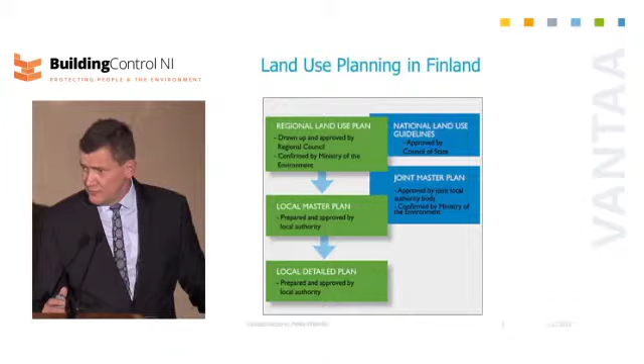So if you buy a plot where there is a detailed plan, you have the right to build there. If you apply for a building permit, and the plan is according to the local detailed plan, we have to grant the permit. We don't have any discretion in that respect.

Here is an example of a local detailed plan. For us it is like a law. The picture shows the plots, the roads, and also places for schools and kindergartens. It is approved by the local municipality, so there is no state involvement - these are independent decisions of municipalities. We have 300 municipalities; the smallest has 1,500 people, and the biggest, Helsinki, has 600,000. They all have the same rights and the same law behind them.

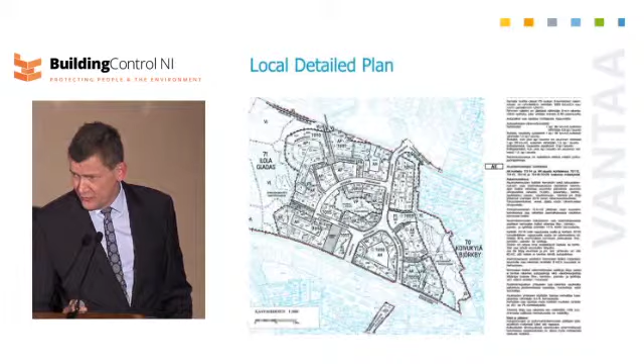Here is the simple structure of a building permit. You have on your seats a small brochure of our building process guidance for one-house buildings. First, we give guidance to the builders before they even start to plan their building.

Then when they have planned their building, they make an application form. Our system is such that we approve every main designer, so the applicant must give us information about the main designer, and then, depending on how difficult the building process is, we approve the qualified main designer. He makes the drawings and then submits an application form.

Then we have to make a notice for neighboring landowners - all the neighbors will be informed that there has been an application for building.

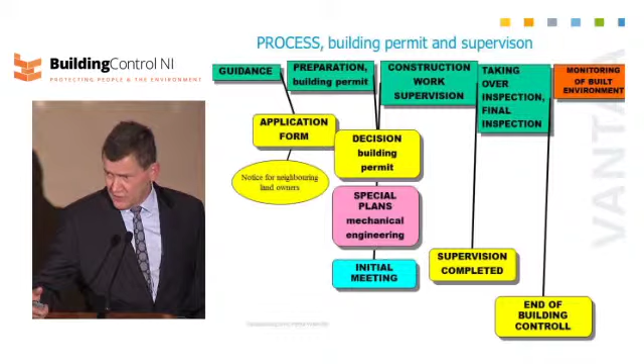And then when the building work has been completed, we have a kind of supervision, and we give the owner of the building the right to take it into use. This is our kind of momentum, because if we don't give permission to take it into use, it cannot be used. If they try to move in, then we can get the police or something else to stop that activity.

And that is the taking-over inspection. And then after that, this is the end of building control.

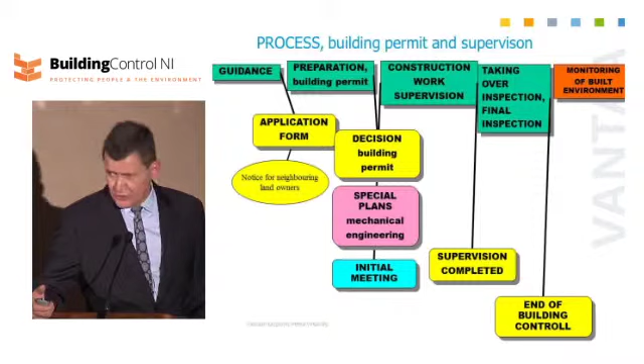Then we also have an obligation in Finland to supervise how people take care of their buildings, so that we have authority to give them orders to paint the building or take care of it, also the groundings. And that is our job today.

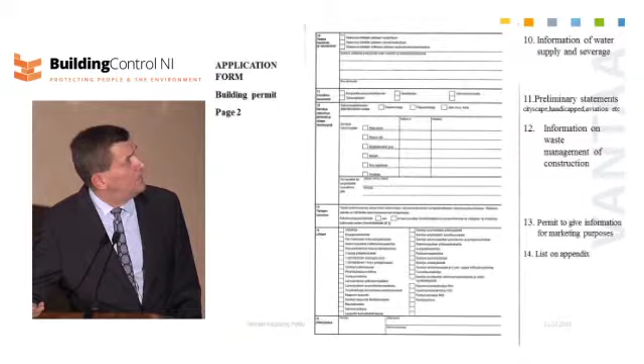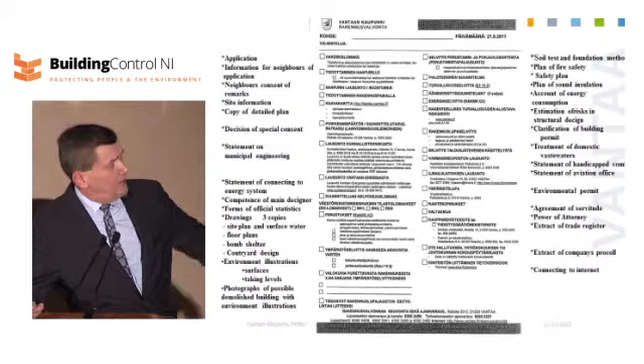Here is a normal application form. There is what kind of preliminary information we need. Here are all the kinds of papers and plans that we need for making the decision on the building permit.

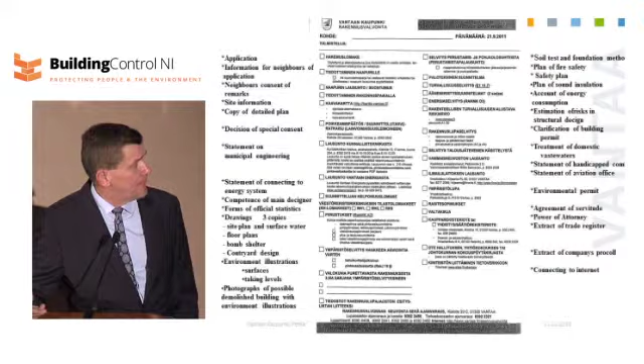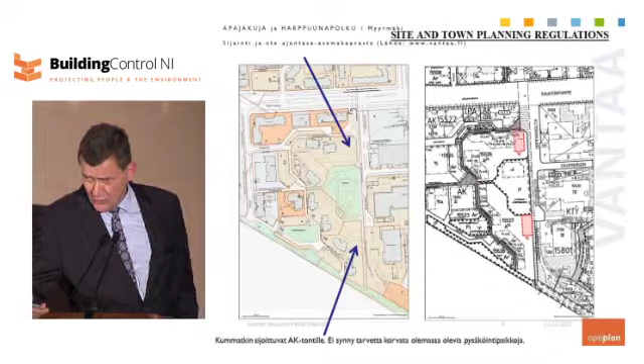Here is an example of a building. There was an 8-story building built there. There is the master plan, or detailed plan, on the right side, and here on the left side, what has actually happened there.

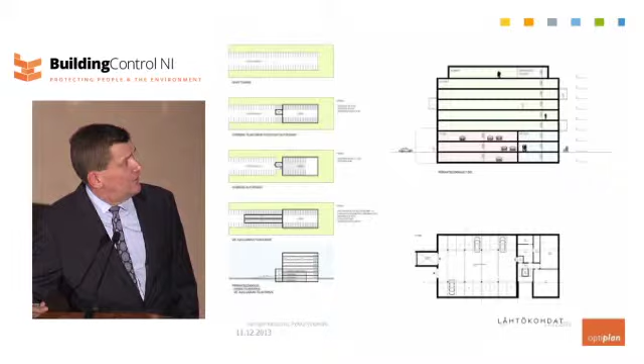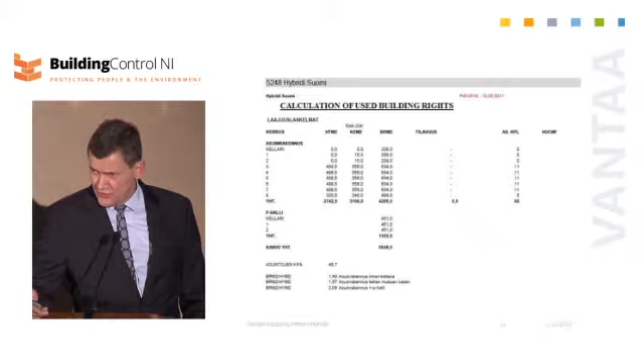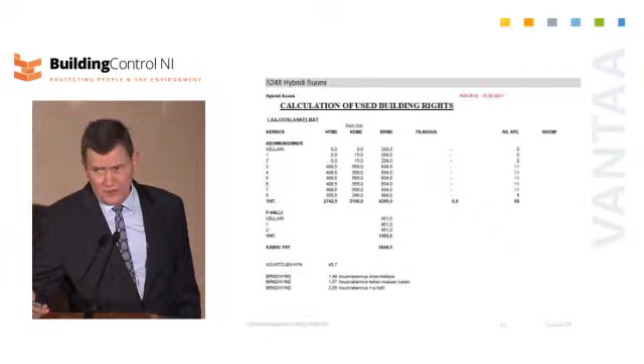Here is a normal house. There are two blocks of parking and then 5 blocks of housing. And in Finland, the master plan has very detailed norms of how much you can build there. Every square meter is mentioned there.

Then for the last 5 years we have had very strict energy saving norms in Finland.

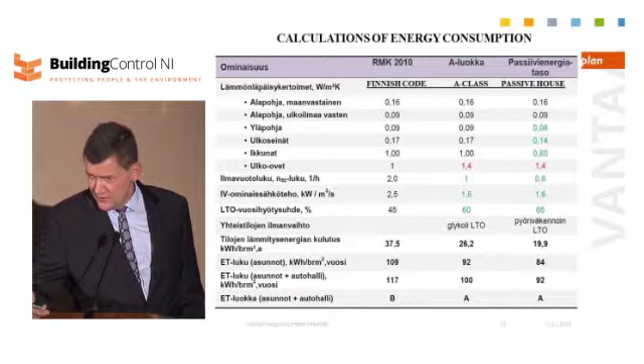Then there is the fee for our building control. If we think about a single house, the normal fee for building control is about 1,500 euros. It's much more than you have here in the UK, but no one complains about it in Finland.

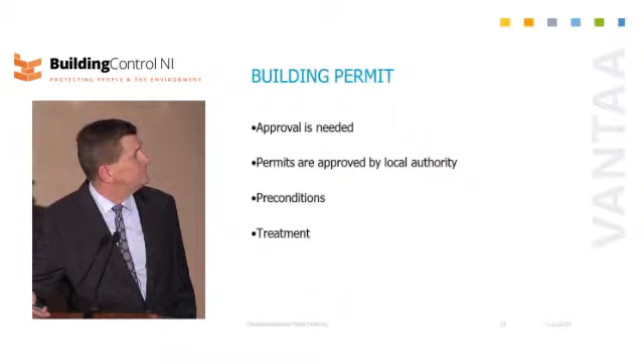Now, our problems in Finland: we have 300 local municipalities, and every one has its own local building controller. In Helsinki there are 120 people working for building control, but in smaller municipalities, the building controller is also the city architect, and that's why the expertise and knowledge about technical things is very low in most of our country. I think in the 20 biggest cities we have very good control over building processes, but outside them it is very poor.

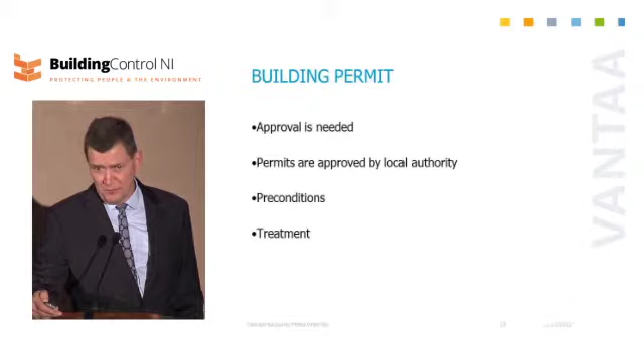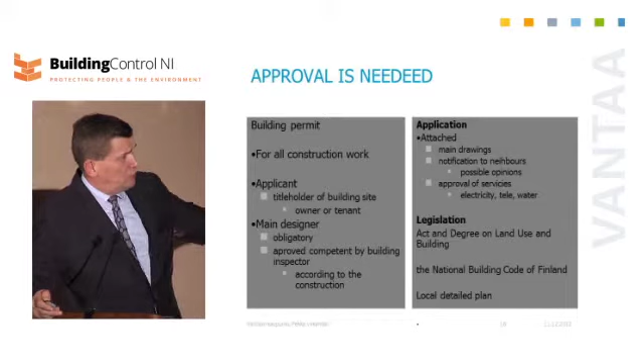But you have the material there in your booklets, so I won't go into details anymore.

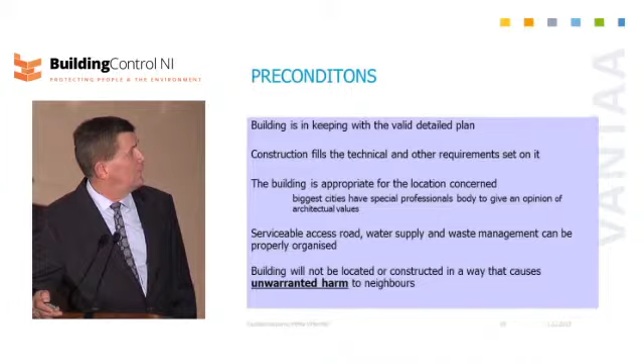But generally speaking, you have struggled with your position in the UK; here in Finland, people rely very much on building control, so we get more and more jobs all the time, and also more and more personnel, so there are no problems with building control. We only have to organize ourselves so we can give standard quality across our country. Now the government has decided that by 2016 there should be only 50 building control bodies covering the whole country, and we are very much looking forward to it in our association.

The association that I'm also representing has 700 members out of 1,000. It is voluntary, and we also have educational days, 3 days in March.